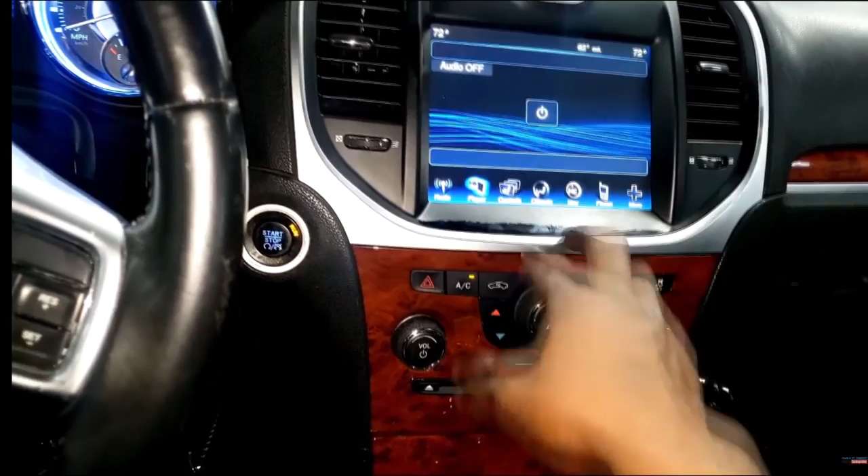Now let's try to activate the heated seats. This is a pretty sophisticated system. Some cars have a switch you can merely turn on to actuate the heated seats, but this one has a unique setup. Most of the controls are right here in the entertainment system. Pretty convenient. Let's see the controls. Yes, here's my heated seat controls, guys. So you have one switch for the driver's side and one for the passenger side. Since I'm sitting in the driver's side, let's activate that one and see if the seats get hot.

It's not even turning on, guys. Oh boy. Okay, I can hear the connection via the electronic display, but the box is supposed to light up signaling the feature is on. All right, guys, we have a problem. So the customer is actually right, and in fact the seat is fairly cold.

All right, guys, one thing you should keep in mind when dealing with a situation like this: this heated seat, like any other feature on most cars, has a module that controls the heated seat operation. And when knowing that, you should also know that heated seat module is likely on the bus.

So if you want to diagnose anything on the bus network, guys, you will need a scan tool. And I'm not talking about your typical AutoZone scan tool that you plug into a data link connector. You will need a better, more sophisticated scan tool connected to the data link connector, so we can go to the computer and see exactly what the computer sees. Because if I can see what the computer sees, it will help me in diagnosis. We're going to find out what's going on with these heated seats, guys.

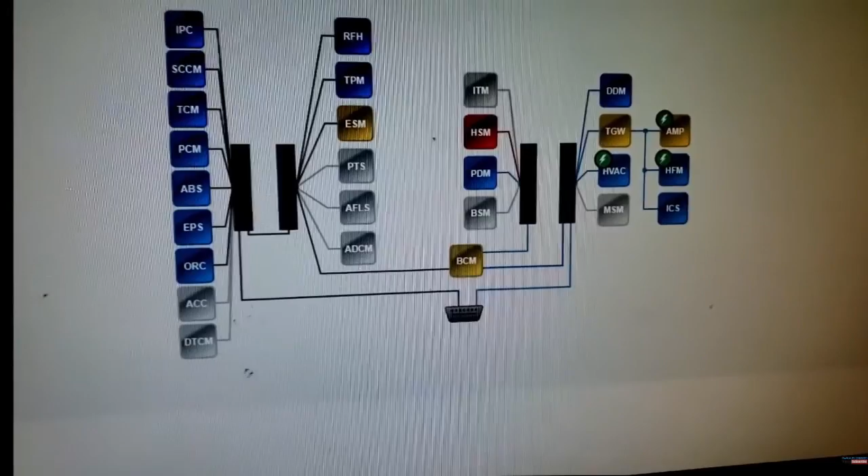Let's get it. All right, guys, here we go. I'm sorry, this is a 2012 Chrysler 300. Well guys, as you can see with my scan tool connected, you can see yellow typically indicates fault codes in these respective modules, guys. But when you see red, that's not good, guys.

Red indicates that this respective module is off the network, the bus network. And what do you know, HSM stands for heated seat module, guys. So the module is not even communicating with anything. That is likely why the heated seats are not working.

All right, so how do you go about fixing this? You can see this looks like CAN B. I'm not sure which bus network this is, but it's not a whole complete CAN network down because the PDM module is up. All right, so what we're going to do, let's move over to how to diagnose.

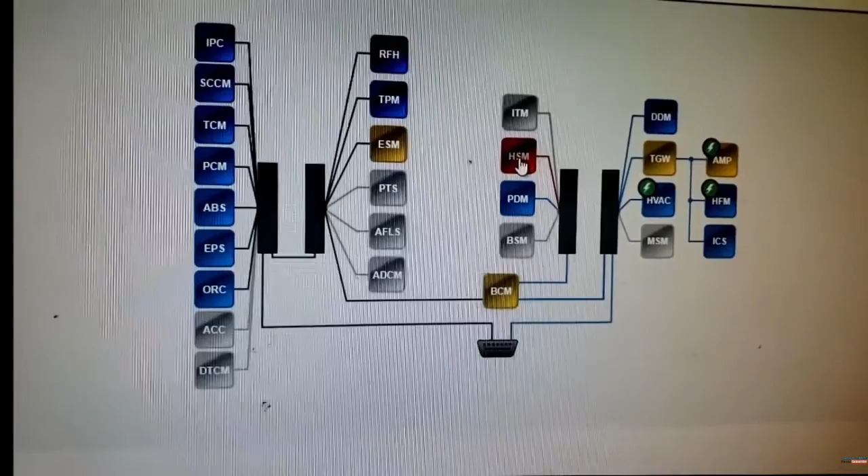This is a communication problem you're dealing with now. All right, let me go take a look at this heated seat module diagram.

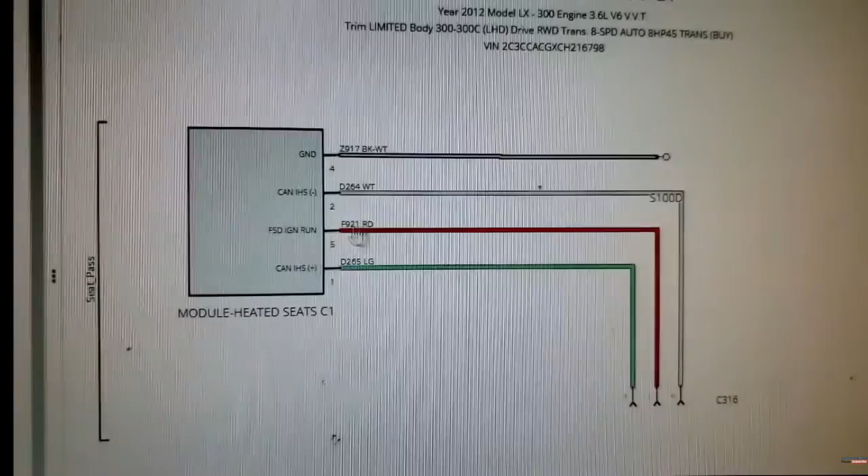All right guys, the heated seat module connector 1. Like I said, this is what you need to make any module operate: you need a power supply and a ground, that's these two right here. And for it to communicate you need bus network wire, CAN IHS module, two bus network wires. So all of these have to be intact for this module to work. But for the most part, the power supply and ground has to be there. If they're not, this module will never work. So before you go replacing the module, you have to verify that the circuit is complete.

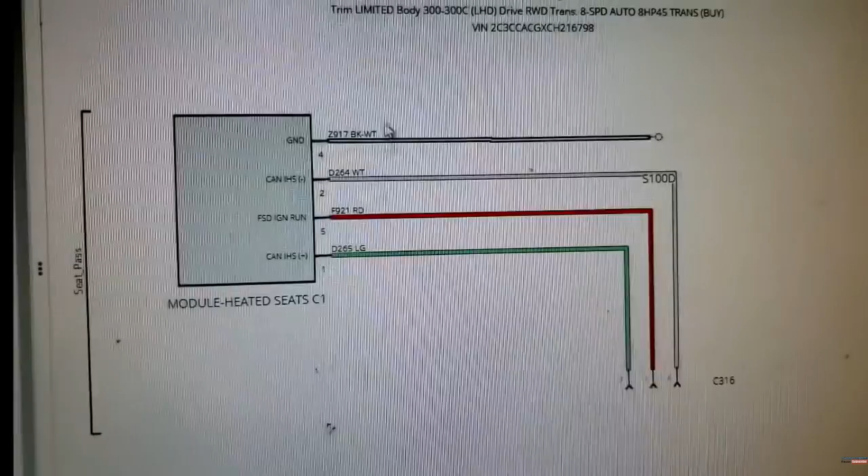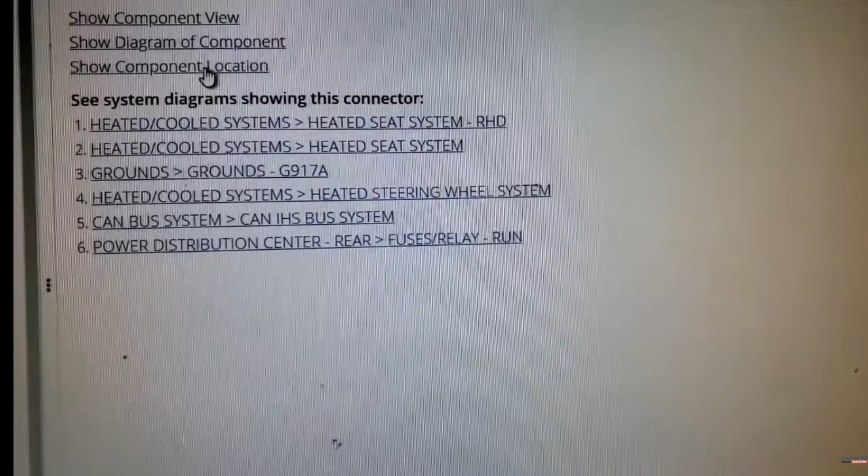Now let's go take a look at the actual connector. Show diagram of component, show component location. This heated seat module, yes guys, as figured, it's under the seat. That would be right here under the driver's side seat. Now let's go take a look at the component view. Okay yes, the connector, we need to go find this blue connector.

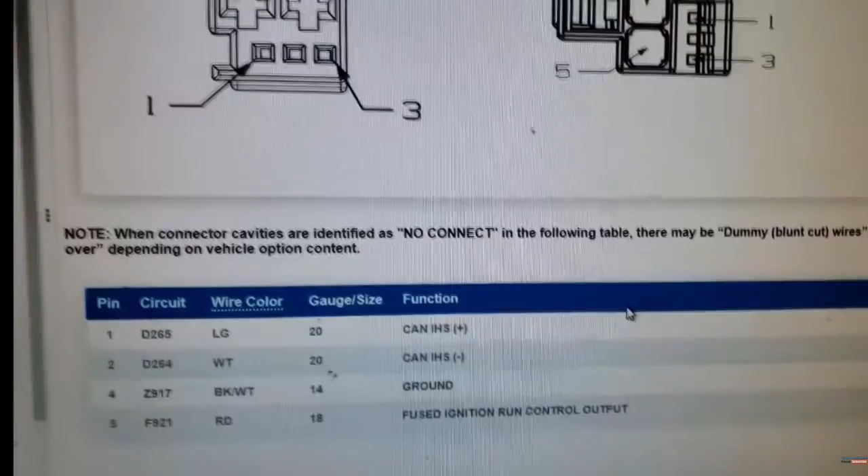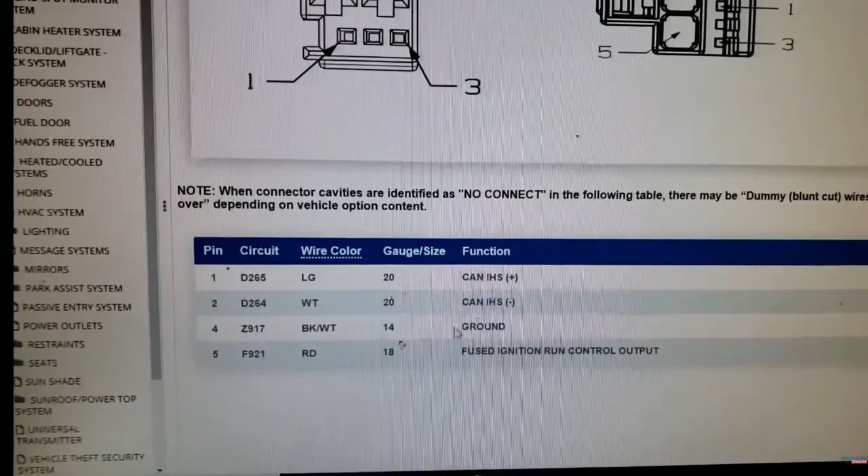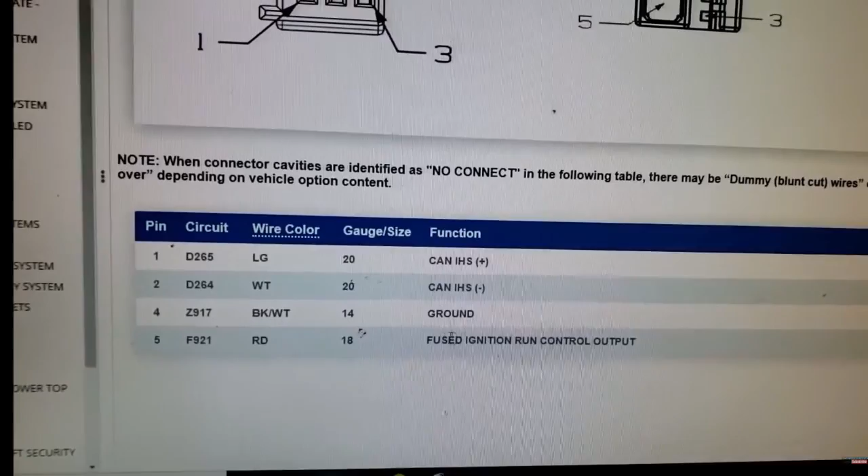Here at this blue connector, yes, 4-pin connector guys. 1, 2, 4, and 5 - it's only using 4 slots, and here are the 4 slots. So naturally the black and white going to be ground, the red going to be power supply. That's what I'm interested in right now, because without these, the CAN wires do not matter. All right, so we got to find out we got power supply and ground. If you do not have power supply, as you can see, it's protected by a fuse. Yes, that fuse could be blown. But that's not a fix, you need to find out why it blew if that's the case.

So instead of speculating, guys, let's go find out.

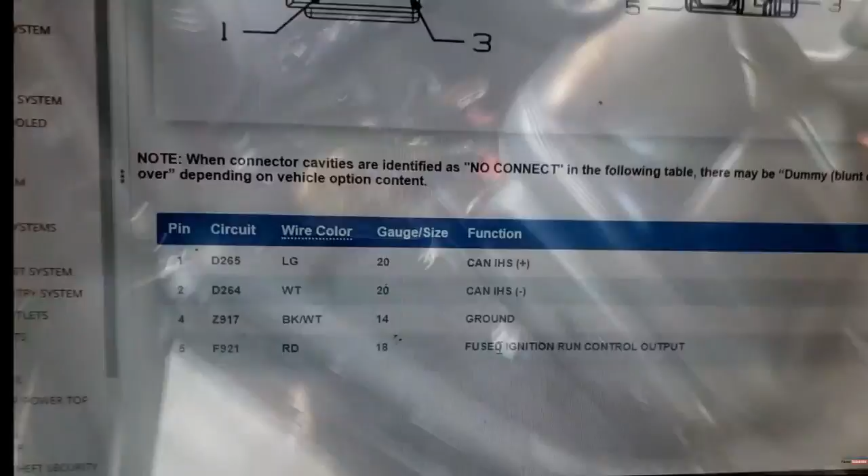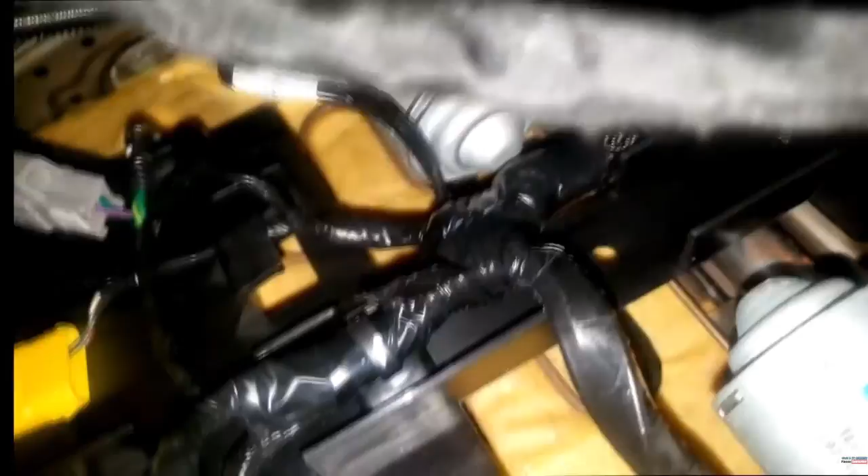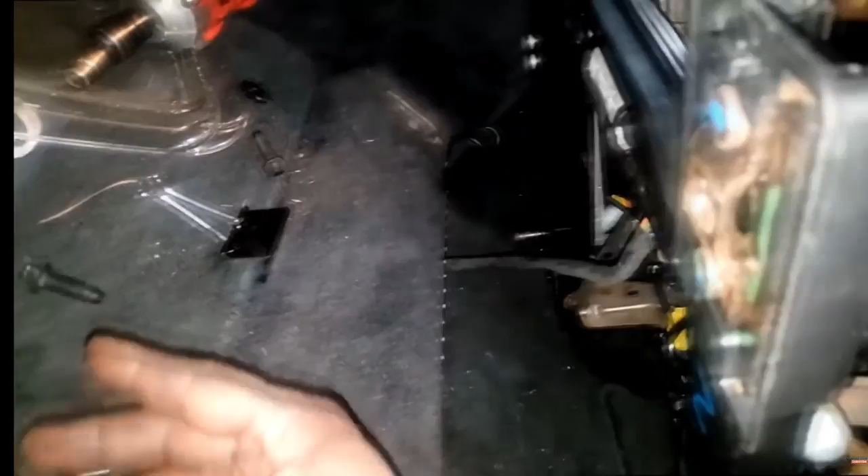Stay tuned. All right guys, I am a little embarrassed. Y'all see this? In my pursuit of the heated seat module, which the book led me to believe was under the seat, I crawled under here first and tried to see if I could find a visual. I couldn't, so I assumed it's tied up even higher. And the only way for me to get a better view was to actually lift up the seat. So I take the seat off, guys. Y'all can see pretty much seats I bolt down - 4 bolts hold the seat down to the frame. These are inverted Torx bits. So I got the whole seat up. Guys, lo and behold, after all that searching, I find no freaking heated seat module.

All right, now what do? I go back to the book, because I went to the book to find this part. The book neglected to tell me which side the seat module is on. So, confused, I decided to go to the other side, and lo and behold, here's my heated seat module right here.

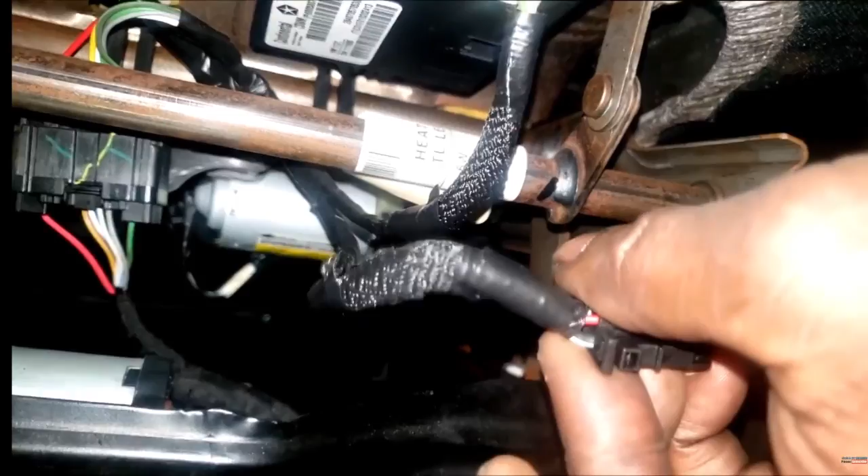Okay, this is the connector that we was looking at. And yes, the red wire is power supply and the black is ground. And yes, there's my test light right here. I already ran a test - oh my goodness, I know some of you want to see it again. I had a hard time finding the ground under here, so I need a heated seat module. I have power supply and I have ground, like I said earlier.

And to take it off, guys, it's just a couple of pins. I got one ordered, it'll be here when it get here. I'll show you guys - it's fairly easy to replace, but we'll go through the motions.

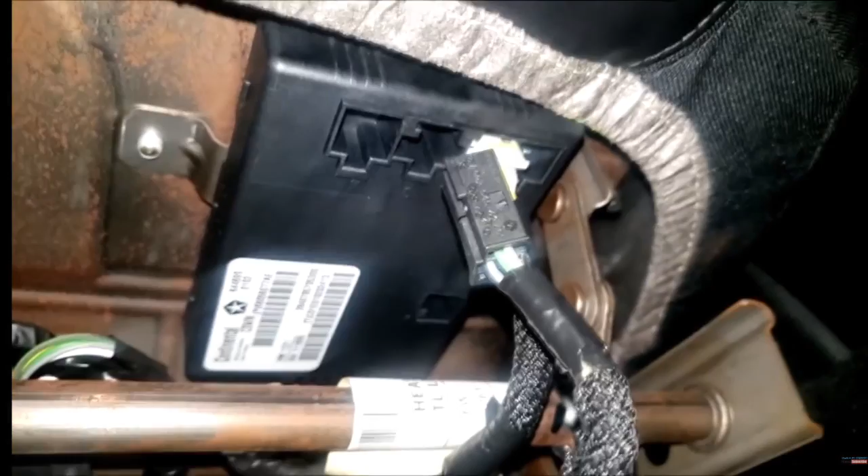Okay, found the heated seat module on the right side, passenger side seat. All right, this is the connector that we looked up on the computer. My wiring harness, my main connector. Without this, nothing else matters - without power supply on this, nothing else matters. Red and black, power supply and ground. All right, that's all I have.